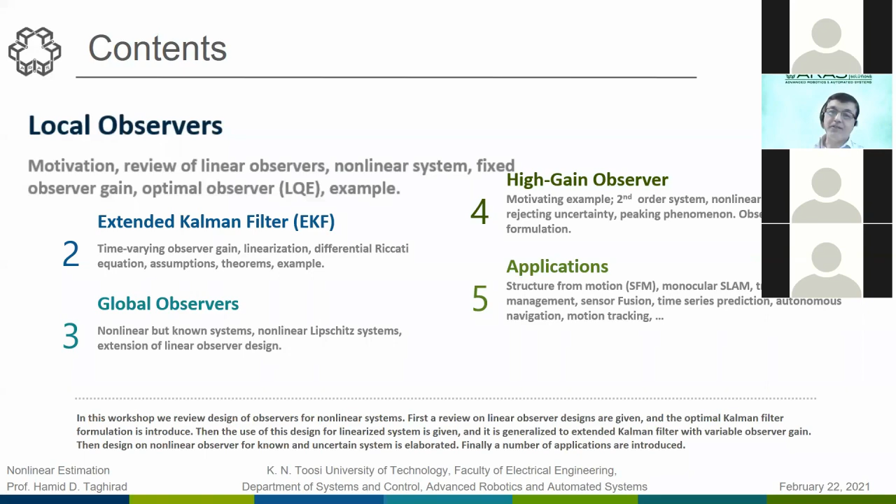Regarding the local observer, I'll start with very simple issues. And forgive me, for the technical students and colleagues, this might be a bit less mathematically elaborated. Let me just give a motivation. Maybe this slide is very important, to give the way that I think about the nonlinear observer.

Nonlinear observer comes after nonlinear control. Basically, we have a nonlinear system. We are controlling the system with many different control schemes, either linear control schemes or nonlinear control schemes. In many of them, we need state feedback, and in state feedback, we need full state information.

This full state information requires a number of expensive measurements, and this is usually not plausible in many applications. So we have to somehow know about the state of the system, but we are limited in our ability to measure them. Here, the need for a nonlinear observer comes into the picture. So we need to estimate the states instead of measuring them. Any measurement equipment costs at least $1,000 or more. But the estimation needs a bit of thinking, and of course it requires a number of requirements to be done like that.

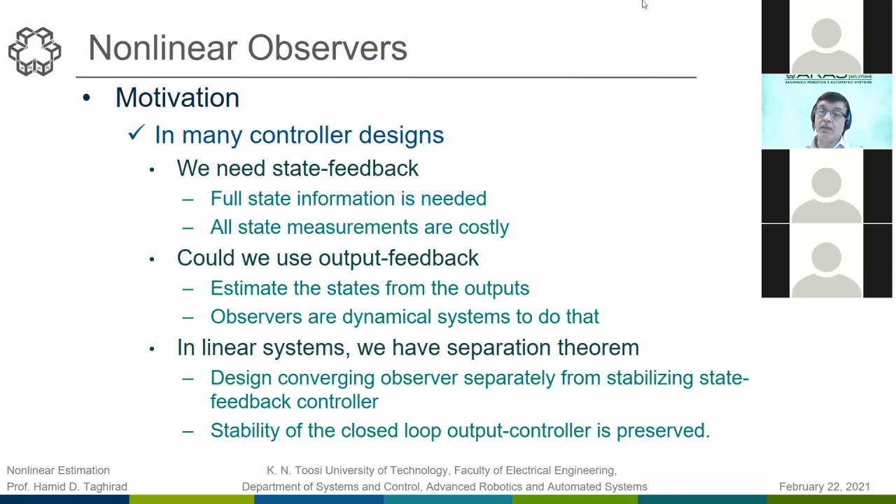Now let's start with a very simple linear system. Consider we have just a review of observer design in linear systems. Consider we have a linear system x dot equals Ax plus Bu, with y equals Cx—everything linear. So the concept is that we would like to have a full state observer.

We can also have reduced order observers, which we don't cover here—you can think about the Luenberger or reduced order observer easily from what we're extending here. Suppose we would like to estimate all the states of the system: a system like a stock market, a meteorological or weather system, or whatever is of interest to us, maybe a mechanical system, a robotic system, or any industrial application. It could be in finance, it could be in many areas.

Since we have an estimation here, we also have a requirement for having the state observer. Now we would like to produce this estimation through a dynamical model, or dynamical system—a number of differential equations that we are using with some inputs and output.

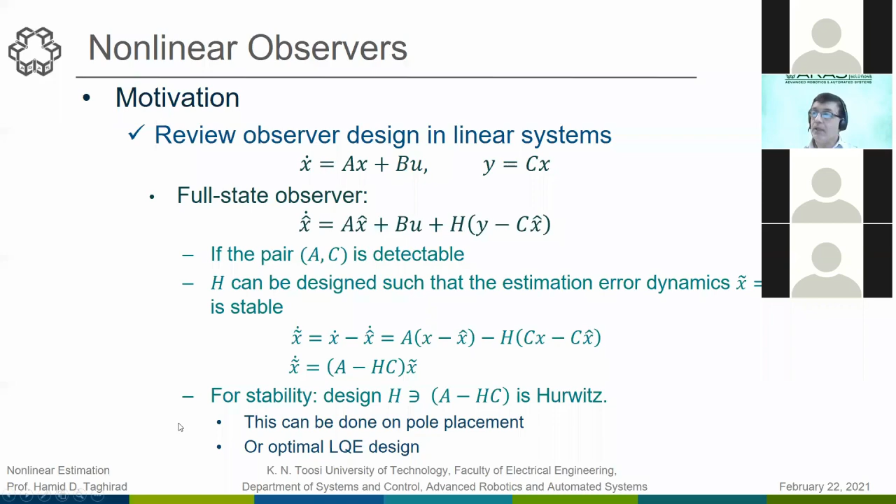So if we do that here, as you see, we can design this through pole placement very easily, or some optimal control estimator. We call it LQE or LQG. That is usually learned in linear system design. I will explain to you about that in a few moments.

Now, considering that we have handled this issue quite easily, since we have the motivation in a linear system, let's now go through the nonlinear system, starting with a nonlinear system and the same concept. Please interrupt me, just raise your hand or interrupt me. We are here to hear your questions and comments.

In a nonlinear system, we have the same thing. We have a model for the system, but a nonlinear model: x dot is equal to f(x,u). And an observation model, which is also nonlinear: y is equal to h(x). This could be a simple single variable model or a multivariable motion model. The more we can measure the system, the better we can get more information about the state.

So if we would like to design a full observer, very similar to what we have done in linear systems, we put the motion model plus the observation model together with a gain here. But the gain is different. It might be at least time varying. It should be different depending on the dynamics we are having and the error that we get.

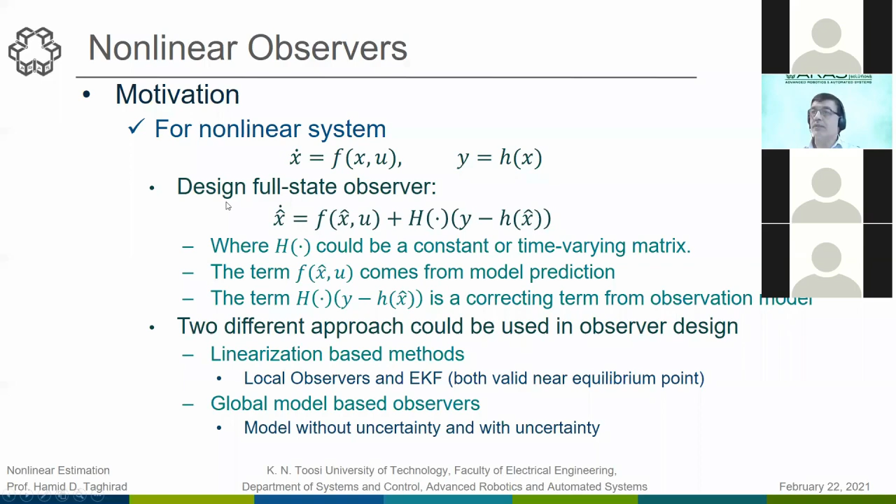Now that we have this part, let's see about some local observers that we are working on. The local observers come from this here, so we have the full state observer. Let's start analysis about that. So we start with the linearization approach and the local observer here.

The introductory part is finished. Now we can think about how we can analyze the local observer for a system. So we have a nonlinear system, and if you don't mind, I'm using the notation given in the book of Khalil, and also we have some programs produced here. I will provide the programs available to you through the website of the workshop, so you can have more training after this workshop.

So we have a nonlinear system, we call it equation 11.1. The main dynamics of the system, the full state observer as we discussed before, equation 11.2, and we would like to analyze the estimation error of the system in this equation, 11.3.

Basically the dynamics model of the system, or the motion model of the system, and the error that we have in the observation model, or in the observation that we can get feedback from it.

Now consider that we have an equilibrium point x tilde equal to 0. Why 0? Because we are requesting to have zero error at the end, at least at the states, at the steady state, at the end, as time goes along.

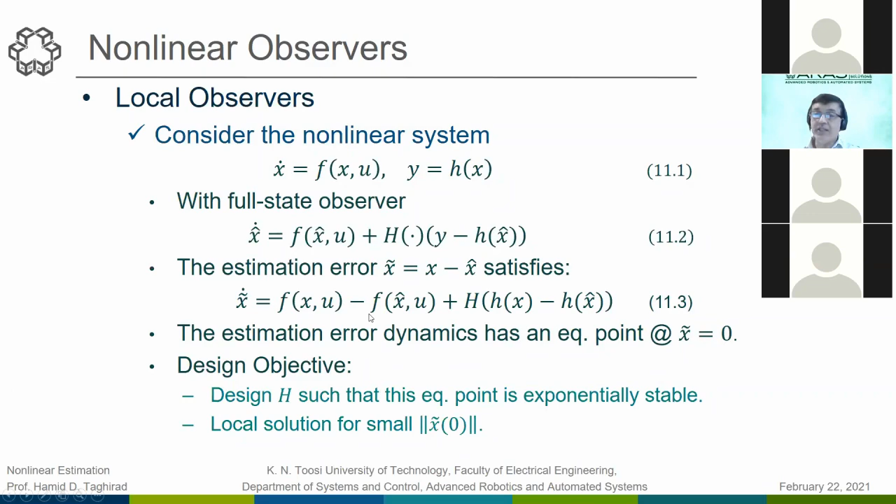How do we analyze this? We will use the linearization method. So we linearize this equation, just take the derivatives and evaluate them at zero, at this equilibrium point. You will find the linearized dynamics from two parts: the linearized part of the motion model and the linearized part of the observation model.

Of course, this is not truly nonlinear anymore, this is linear, but this is the way we start developing the idea here. It would be very good if we just left the linearization and went directly to the nonlinear part, but that is more advanced, and I need some time for you to think about the concept. Hopefully in the afternoon session we will discuss that.

So we have a nonlinear system, and we have linearized it here. We can see quite clearly that since these have some variation, we cannot stabilize the system. We cannot get exponential stability with a fixed H for all points, and this is the true limitation of linearization.

So what we will do: since this is a time-varying system, it's quite understood and understandable that H should also be time varying. But we don't start with the time varying case, we start with just a fixed case here.

As we see, consider that H is fixed, and just analyze the steady state behavior. We don't go through all the dynamics and the transient response that we have; we go through the steady state equilibrium point.

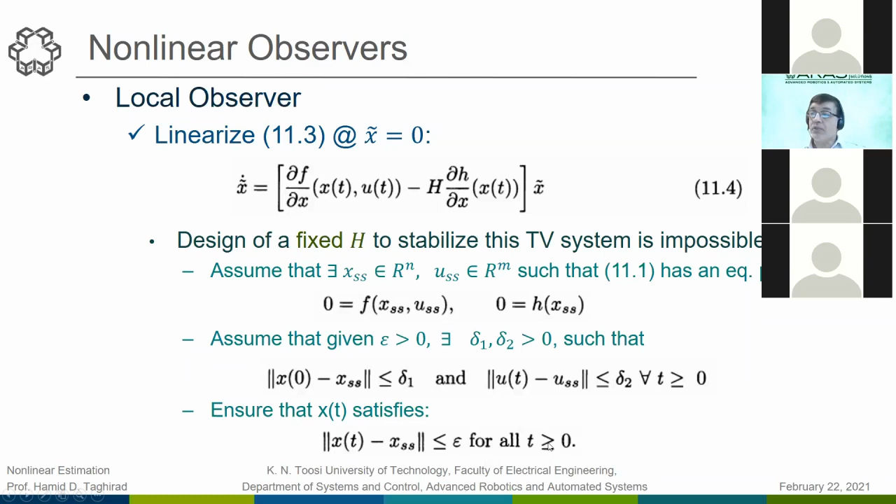Could we do that? Let's go back up and see it again. This can be done with the design of H. This H should be the observer gain, and should be such that, if A and C are detectable, then we can design H such that A minus HC is Hurwitz.

What does it mean? It means that although your system is nonlinear, you linearize it and use a linear observer as before.

When A minus HC is Hurwitz, it's the same thing we discussed in the linear system. Is it true? This is the simplest way. So forget about nonlinear theory for now. You have a nonlinear system—just linearize it around an equilibrium point, use the linear system, and apply an LQE or pole placement design, and that's final. Of course this will work, but it is very local. And it is amazing that although the system could be nonlinear, even this simple design can work.

There's a true concept here that I will explain in more detail in the future. In this first observer design for a nonlinear system, there is no nonlinearity in the design itself—there is only nonlinear analysis. We linearize, getting the linear model A and C, then design A minus HC to be Hurwitz, using pole placement or LQE, optimal or simple. We can show the analysis is nonlinear—we cannot analyze it through a linear system, cannot use the separation theorem and so forth, because the system is nonlinear, and the analysis will be nonlinear too.

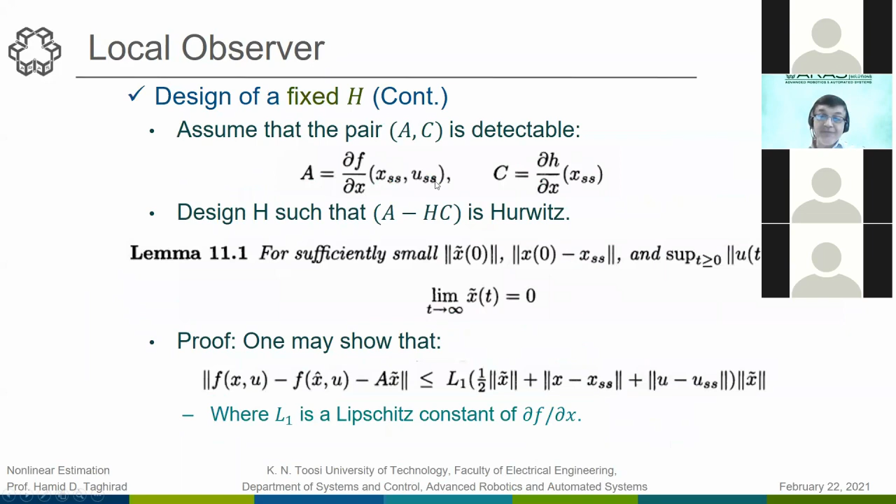Now, if we go further with this design — this is a linear design, but done for the nonlinear system with linearization here — this corresponds with the previous section we discussed. So we have a linear quadratic estimator, and as you know, the full state LQE observer comes with a Riccati equation, solving a Riccati equation.

Again, the LQ observer has the same two parts, the motion model and the observation model, as before. The gain comes from a formulation here: P C transpose R inverse — I call it the British Petroleum formulation. Students who have taken my modern control class could recognize this as a way to remember it.

And here we have a Riccati equation, which is an extended version of the Lyapunov equation. This is a fairly algebraic equation: A P plus P A transpose minus P C transpose R inverse C P plus Q equals 0. So first we should solve this equation.

This Riccati equation is nonlinear, and of course it's solved by a numerical solution using MATLAB or any other software you're using. You should give the Q and R here, and one particular condition is that R should be positive definite, since you are using R inverse here. Also, A and C should be detectable. These two conditions should hold for the system we want.

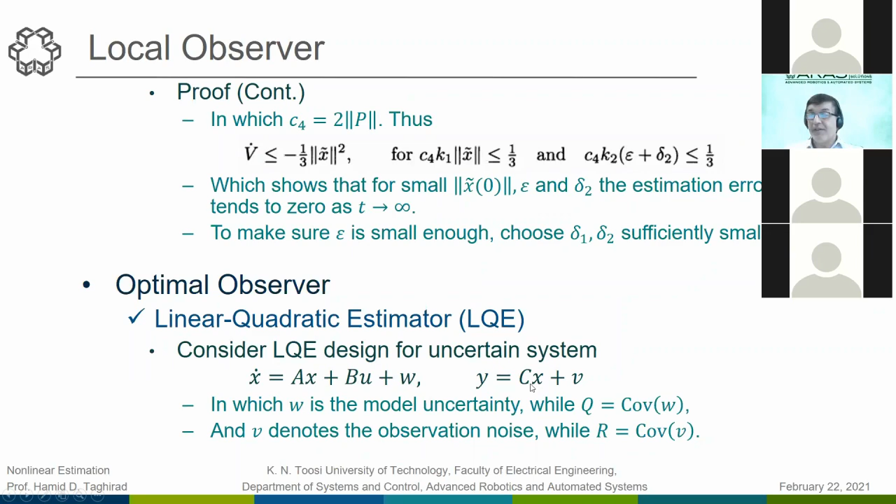But the underlying concept here is that the LQE will minimize the error. This error, X tilde transpose X tilde, has both W and V inside of it. So some part of it is because of the model error or motion model error, and some part is about the measurement error. This will minimize the expected value in terms of a non-deterministic approach that can minimize this performance index, and the solution you get is somehow optimal.

Why do I call it optimal? It is not globally optimal because it is dependent on P and R, Q and R. Q and R are the values you are giving about the trade-off between the motion model and the observation model, like in all observer design that we have.

This is stabilizing the estimation dynamics to the origin, so we have exponential stability here. And if we would like to, this is a fixed gain—once you design the controller, you can use the fixed gain. This fixed gain can be extended to a more realistic and more applicable gain in the extended Kalman filter, which we come to next.

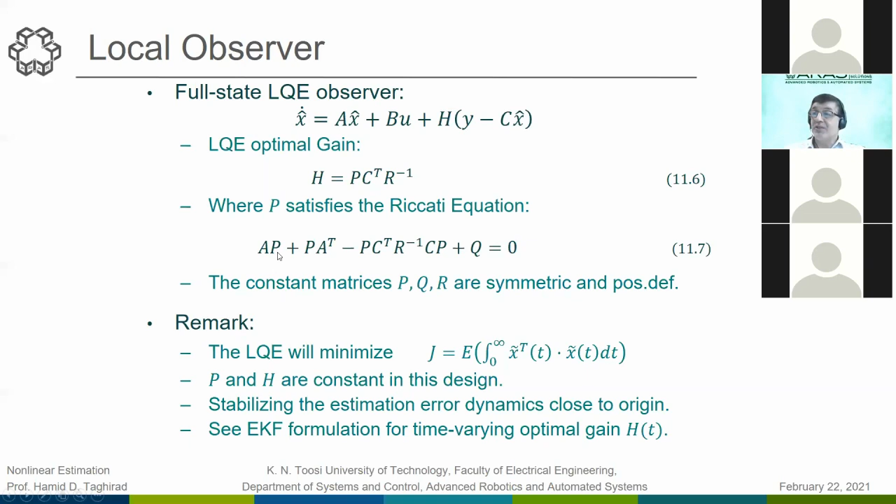If we can make this also varying, and change the Riccati equation somehow to give us a varying gain, the gain should be high at the beginning but maybe less at the end. Or depending on the dynamic behavior we get, it could be up and down. This should be interesting to work on.

Any case, let me give you some examples to refresh your mind. Maybe you can take some water or a cup of tea or coffee to relax, and let me continue. And if there is any question, please don't hesitate to contribute.

Here I give a very simple question, a very simple nonlinear system. The nonlinear system: A1 is completely linear in this part, but B times a nonlinear part is like this, and C1, the observation model, is also linear. B is also linear, but we have a nonlinear part in the model of the system.

So since this is nonlinear, we can take x1 and x2 as time varying here. Everything is nonlinear and time varying, but we can consider the equilibrium point (0,0) as the basis for the dynamics. And we would like to see, if we use the LQE design, is the output converging? Is the estimator converging to the real state transition or not?

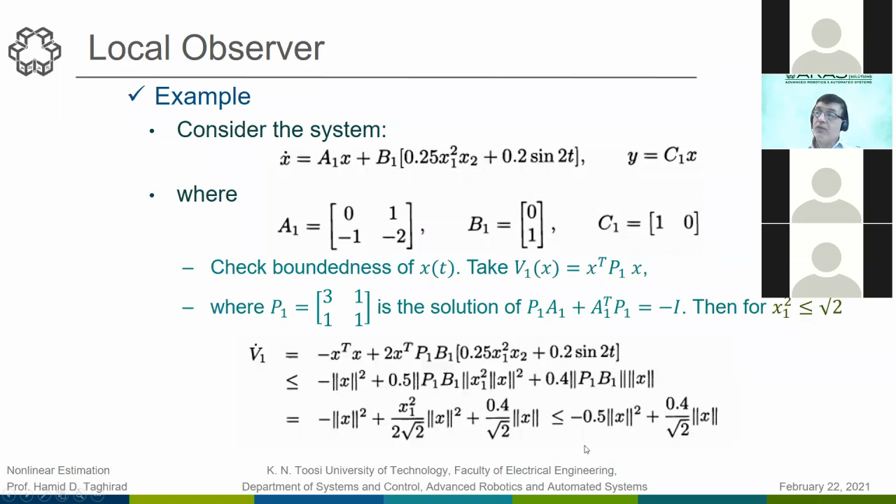And is this positive or negative? You see that it has a negative part, but it has a positive part too. But if we make x small enough, if we have x1 squared smaller than square root of 2, this could be shown to be negative.

So it is converging, but it is local. The minimum of v is equal to square root of 2 for x1 squared equal to square root of 2. For this value, we can consider a set in which v is smaller than that, x1 squared is smaller than square root of 2. Technically speaking, in terms of the Lyapunov equation, inside this set we see that v dot is negative, and since it is negative, we are converging to 0.

So we have a region of convergence here. We have a limited area that we are working, as you see. This limited area, if we are in this limited area, we are working quite well. So this is working, but with low region of convergence. And this is usually not good enough for real application like a robotic application. And if you apply it, you will see that sometimes it is working and sometimes it is not working. And this is because of this limitation that we are finding in this analysis that we are doing.

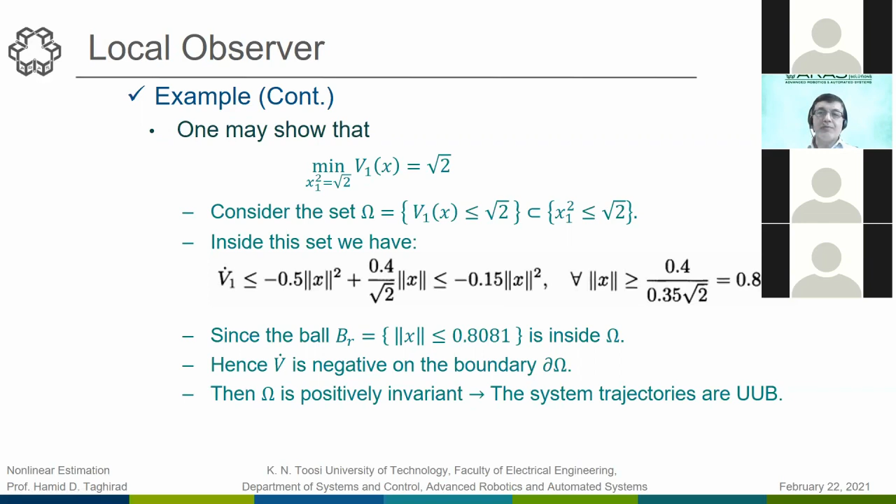So how to improve that? Go a step forward, just one step forward. We have about 15 minutes time, and I hope that we can go through that design as well.

Now, design, instead of the analysis, we can design an LQE estimator for this. Let me also design that and implement it on the real computer to see what will happen. When I put Q equal to I and R equal to 1, this is a naive and very simple approach. This means that I don't have any idea about the model or the noise, and I put them all equal to each other, very naively. And this is not a good design. Although it is working, it will work, even if you just do this design very naively.

So if you put this one to Q and R here, then you can solve the Riccati equation through MATLAB. It is quite easy. You can use the Riccati command in MATLAB to design that. And when you find P, you can get the estimator gain. It is simple values you can get. Since you have two states, you have two values in a vector form, and then simulate the true system together.

You know what we are doing usually in MATLAB? If you see my programs that I will provide with you, I have the true system, a dynamical system. I put the observer system again here. We have an augmented state. We have two states for the true system, two states for the observer. We use the ODE or some integration routines to work with that, and we design that for different approaches and for different inputs or states or initial states, and then we plot the true values and the estimated values together.

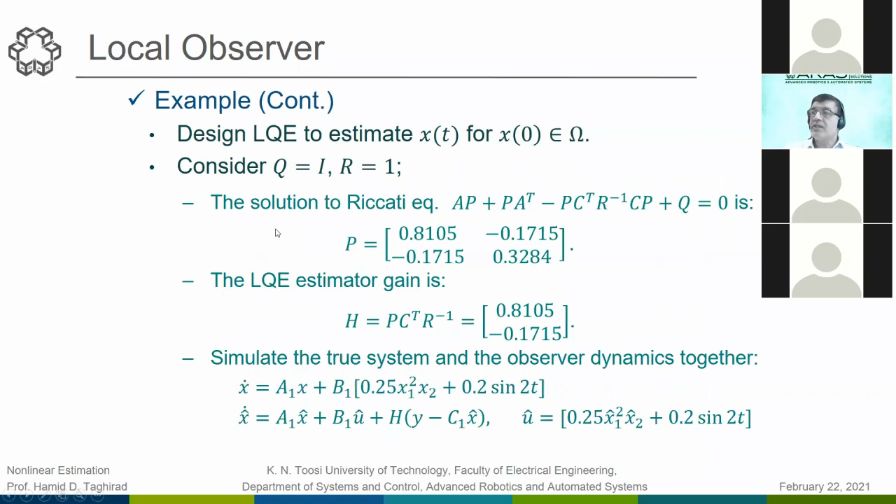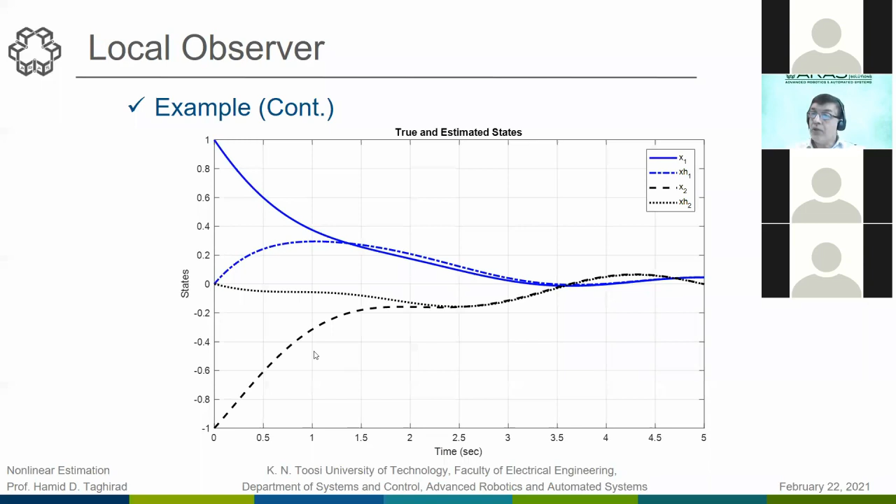And you can, of course, if you make it instead of 1, make it a larger variance, maybe 10, then this convergence is not giving quite well. So you can work on the website to see how it is working.

Now, I don't recommend this for a nonlinear system, although it is working, but I mostly recommend to extend it a bit with extended Kalman filter. The extended Kalman filter has a time-varying gain, and this time-varying gain provides you with more information and more robustness to the real system.

So we have the same old nonlinear system as we had before, and we had basically the dynamics here. We had the Taylor series of this as before. We have A and C, the linearized part, and the delta part as we discussed. These details are exactly the same as before, but the only difference is we are not using just A and C to design the controller, the LQE controller.

We put another Kalman filter gain. I'll just give the result. We say, okay, use a varying gain. Instead of H being quite constant like LQE, make it varying. How varying? This varies with the covariance matrix P that we have. So with the old equation, P and Q are varying. Then, if this is the case, C can vary as well. So instead of making the linearization just for a single operating point, you can have the linearization at any time. So you can have the system at any time. A and C can be considered time-varying.

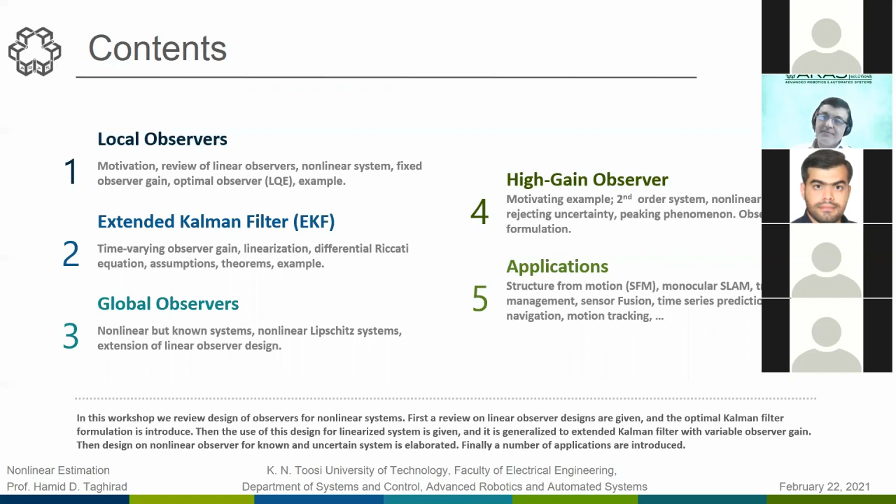Thank you. I was thinking about the proof for stability of EKF, and I was wondering if you need some Lipschitz conditions around the stationary solution, around the zero error, if I want to say.

Or you don't need to bring Lipschitz. Let me bring that, very good. Your communication, but you are asking control. Well, I was always interested in control, that's the second field if I was supposed to choose another field. Thank you, this gives me a bit of time. Thank you for your very good question.

Let me give a short look at the sketch of the proof. This is not the true proof because the true proof is a bit technical, but the sketch is: first we consider that P is time varying, so since we are using P inverse in the V dot, we need the derivative of P inverse. With the lemma we showed before, since P is always positive with lower and upper bounds, it is always invertible. Don't worry about that. But within the proof, regarding your question, you see we have some linear part going on here, but we also have some uncertainty.

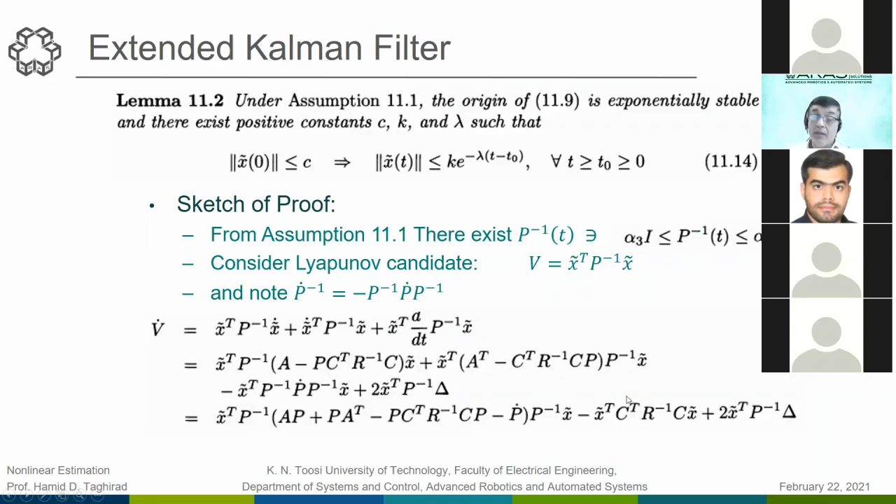The uncertainty is the most difficult part, or rather the most challenging and most important part, because we want to use this extended Kalman filter in real communication systems, for example for tracking or for issues you find in satellites or different dishes and so forth. So this part is the main part which somehow disturbs or puts some constraint on the system.

If we use the Riccati equation, the V dot comes to here, as you see, and we can see that with the Lipschitz condition you mentioned, this V dot is equal to three parts of errors: x to the power 2, x to power 3, and x to power 4. If you consider just a simple Lipschitz condition, you don't need the power 3 and 4 terms here. It would be much easier.

But when you use a more sophisticated, more complete version of EKF, you can have a wider range. As you see, you have some positive part here—these are perturbing your stability, these are positive, this is negative—so you should find a solution for that. You can find a solution where the negative definiteness of V dot is provided.

So in short, to answer your question: yes, if you have the Lipschitz condition, your region of attraction or range of working of the Kalman filter is larger. But even if you don't have that, if you use a more general version, as I'm proving here—I didn't prove it myself, but I use the proof given in the literature—you can show that with some positive constant, if you can find this constant, you can find the region of attraction quite well, and you have exponential stability for the system.

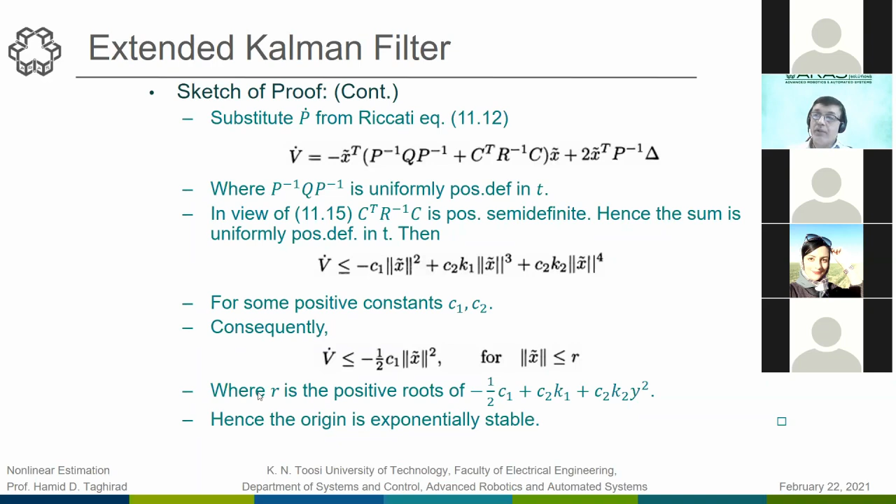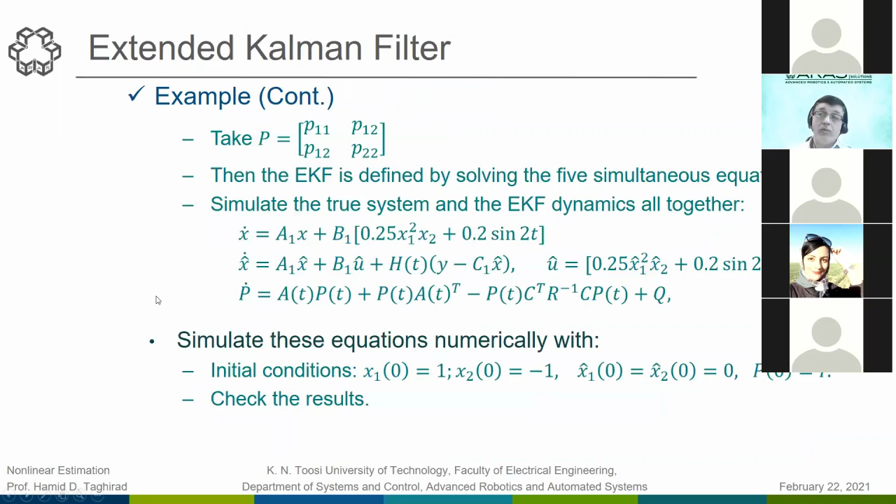Sure, of course this is the topic of our next session. We will go through the nonlinear observers, don't worry, we have that topic for you too. It has more challenges, more difficulties, but a few benefits which give you a wider region of attraction for the system. So please be in our next session, the second part of the webinar, where we will talk on certain topics and will guide you how to follow the issue.

Expected value. Good question, because if we have non-vanishing uncertainty, when you are talking about not the covariance but the variance or the mean value of that, if it is not Gaussian, then the Kalman filter is not working. This area has its own limitation, so it has the assumption that the noise and the uncertainty is Gaussian. But this is not the end of the world. If it is not Gaussian, if we have disturbance, we can add them. If we have non-vanishing disturbances, we can add them to the formulation in terms of if we know them, or we know the bound of them, and then we can have some more robust observer design, some other perfection that of course can be followed the same way we introduced in the nonlinear control scheme. We start with the simple one, and then we can add some robustness, some sort of adaptive version or some other means to do that.

But the extended Kalman filter is working very good in practice, so don't go into further details if you don't need it. Even if the system is not Gaussian, still the extended Kalman filter has no proof for that, it's not claiming that it's working, but in my practice it is working quite well. Try it, just try it. Okay, thank you very much. Hello, and thank you, goodbye.

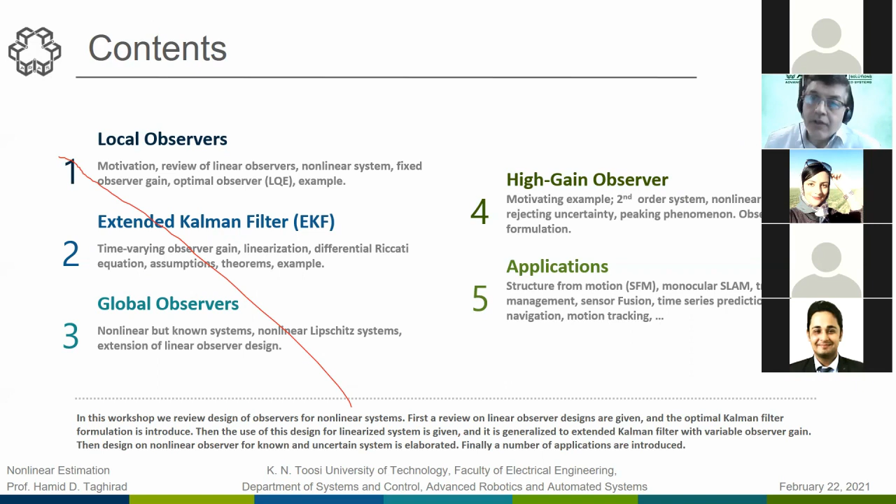Never ask which one is better, I don't say which one is better. My research, you can see my research, I have a number of very good observer designs on state-dependent Riccati equation SDRE, and RSDRE the robust case, and so forth and so on. But usually the issue is when you should use them. All of these issues, this may be of particular interest, I refer you to go to my papers, go to my homepage and papers. I have a number of papers on state-dependent Riccati equation; they work well if you can put the system into SDRE form. At the end of the slides, which is also available to you on the homepage, and I put it on LinkedIn as well, you can see a number of references that you can follow for your question about that. Thank you very much, and goodbye.